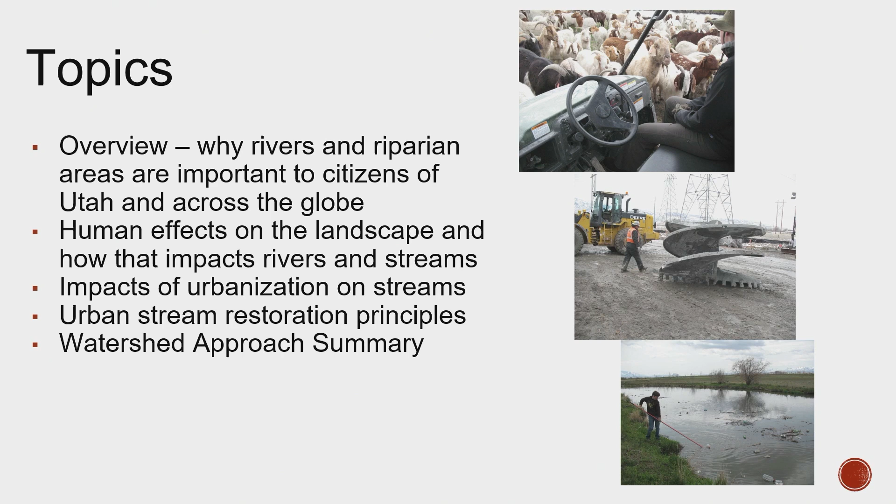So we're going to talk a little bit about why rivers and riparian areas are important, in Utah and really around the globe. Human effects on the landscape and how it impacts rivers. And then we're going to drill down on urban stream restoration principles, and really summarize with our watershed approach and how we work from here.

So how do rivers benefit humans? Maybe this is a rhetorical question, or you can think about what are the things that we get from rivers. We talked a little bit about irrigation, drinking water, and river and stream health is part of our water supply, and sometimes we don't think about that. There's a functional flows work group at USU right now that are looking at how much water should be in a stream to keep it a stream, and is it really a river if there's zero water in it?

Maybe sometimes. We also talk a little bit about ecosystem health. Biodiversity, fish and wildlife habitat, and water quality are really important to us. If you ever see a degraded stream and you think, oh, I really am thirsty, you don't really necessarily go and drink the water out of there. So we need to maintain that ecosystem health for that water quality.

We also have flood resilience, decreasing the risk of flooding, and increasing resilience to climate change. We know we do have these big years, then we have drought years. How do we have that broader suite of services that we can provide?

And then human activities. Recreational values is really big, natural heritage, and cooler temperatures in some certain situations. The picture there on that side is actually of Blackner's Bend. Who's been out to Blackner's at the mouth of Weber Canyon? Paul's been there, and some other folks. So that's a restoration project that was done on the Weber. It's pretty cool if you have a chance to get out there.

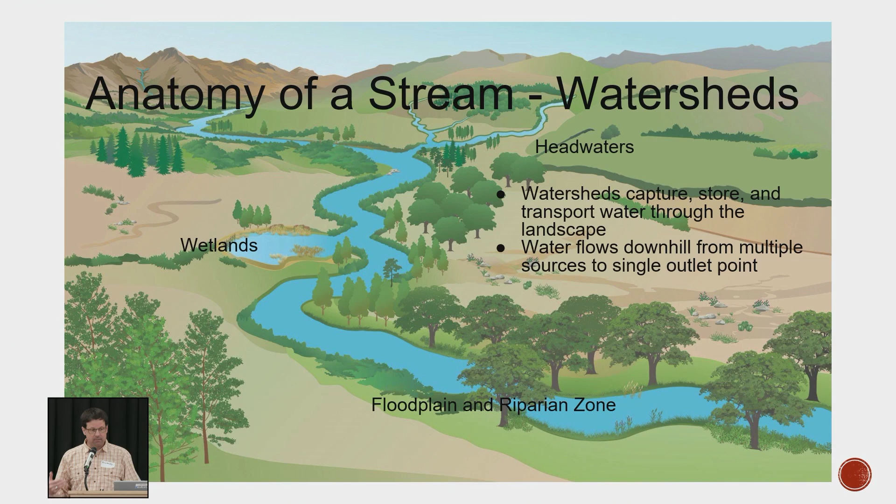So we talk a little bit about watersheds, and everyone thinks, oh, watershed, yeah, it's the area that water comes from and then goes down to Great Salt Lake or wherever. But there's a significant difference between the upper watershed in the Weber and the lower. There's a rural component up higher, and then we get down into here and we've got more of the urban areas, lots more roads and impervious surfaces. So the headwaters are significantly different, and they need different management practices, as what we're talking about today, which is where we're in more of a built environment.

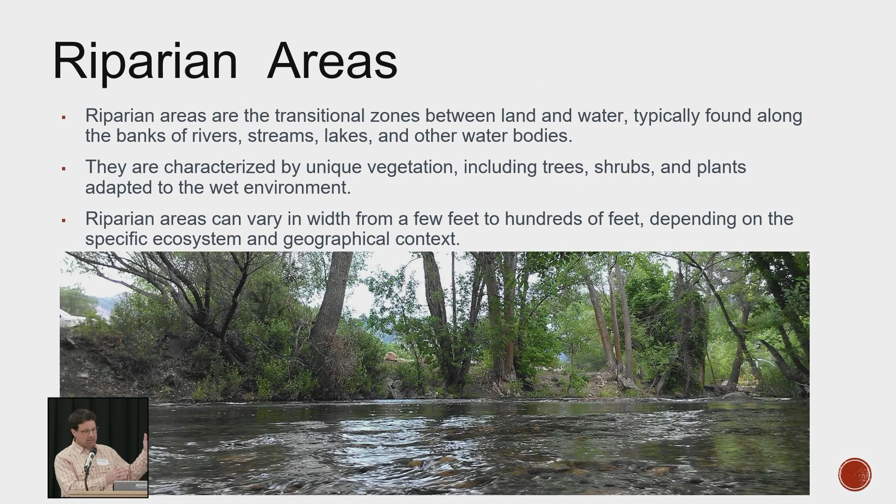And so who here can define a riparian area in one sentence? Maybe nobody. Two sentences. No. So riparian areas can be defined as near flowing water with certain type of vegetation, but it does require sometimes humans to come in and say, all right, what really is a riparian area? Where is it here? Especially in urban areas where we've impacted the water so much that they're not really like cottonwood forests in Montana or whatever. It's different. And so they are near flowing water. They have a certain vegetative characteristic, and generally, part of the floodplain is what we're looking at. And they can vary from a few hundred feet or less, depending upon the ecosystem and the geographic area.

So Paul's going to talk a little bit about the human component, but I wanted to mention, I put this picture in the middle on the bottom. Does that look like human-made or natural-made? That was on the Legacy Nature Preserve, and almost all of that was made by humans. There's even a bald eagle nest in the background that a guy named Bob Walter stood back up after it fell down in a windstorm. So, when you add water, it really helps. So Paul's going to talk about the human component.

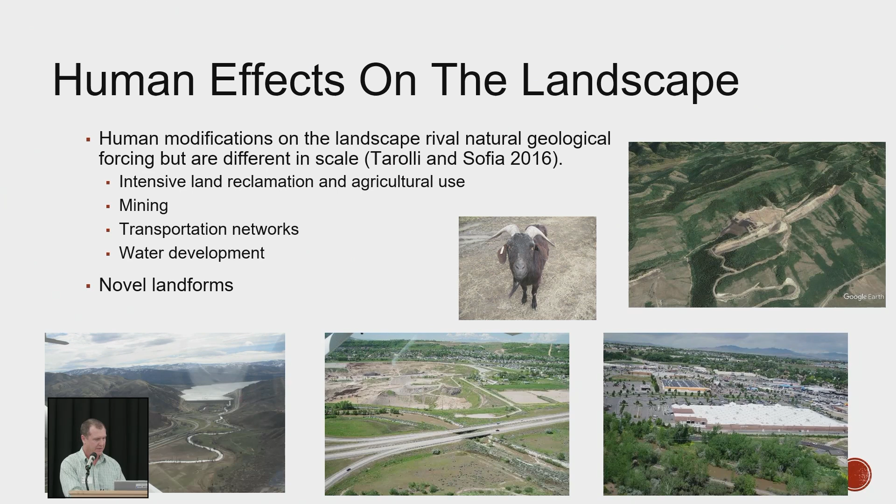Really briefly, we've been talking about this quite a bit today, but humans have dramatically reshaped landscapes through land reclamation, expansion of infrastructure, altering natural flow regimes, and all these practices are really important for society, but they also have major consequences for streams and stream channels and river health. This is the same imaginary watershed that Eric showed earlier, but it illustrates the accumulation of impacts within a watershed.

Oftentimes when we're looking at challenges with a river or stream, we're faced with a site-specific challenge related to a waterway. For example, maybe we're dealing with eroding banks or sediment accumulation in the channel. Oftentimes that site-specific challenge is a symptom of larger scale issues that we don't necessarily see when we're just looking at a specific location or area.

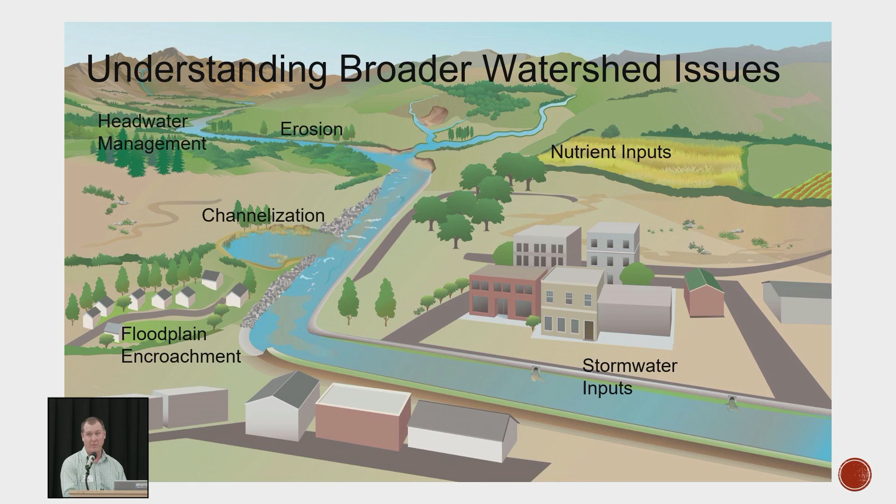So in this imaginary watershed, there's lots of things going on that might be leading to management challenges, such as headwater management, erosion up in the middle of the watershed, maybe nutrients coming from agriculture or urban landscapes, stream channelization and floodplain encroachment. They can all accumulate and really affect what we see on the ground when we're dealing with stream channels and urban rivers.

During high water, this bridge catches a lot of debris from the Weber River, and the consequences of that are it backs up the flow, causes sediment to deposit upstream, and changes the channel morphology up there. So when we think about managing specific reaches of river, we have to take into account these kinds of things on the landscape, because we're not going to be able to move this bridge, at least in the near future.

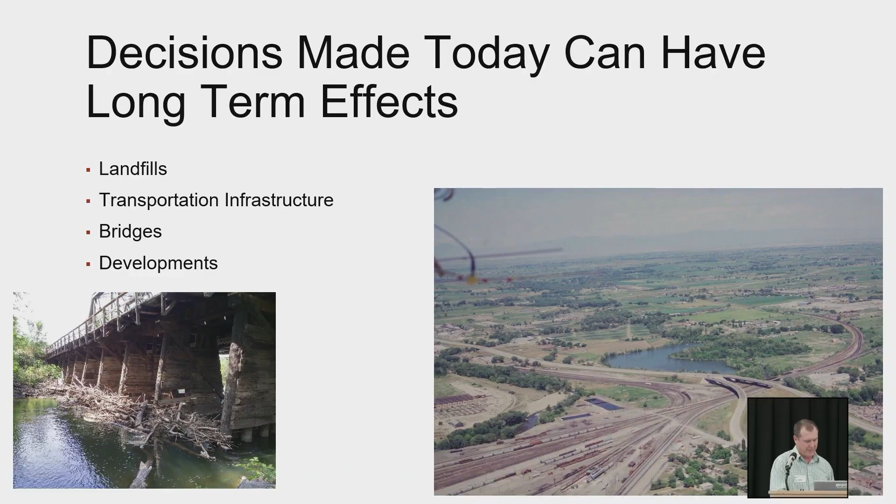It's a fixture on the landscape that we have to deal with. The picture on the right illustrates the confluence of the Ogden and Weber River back in the 1960s - this is actually a photo of that area in the 60s. The main characteristics to highlight are a pretty broad riparian area and meandering stream channels. But when you compare that to this Google Earth screenshot, which I tried to match up as much as possible, the landscape's changed, right?

A lot of industrial areas have encroached on the Weber River. Right in the middle - I don't know, there's probably not a laser pointer, and if I can make that happen... doesn't look like it. Right in the middle, right above the pond, is a large landfill that's been placed right at the confluence of the Weber and Ogden River.

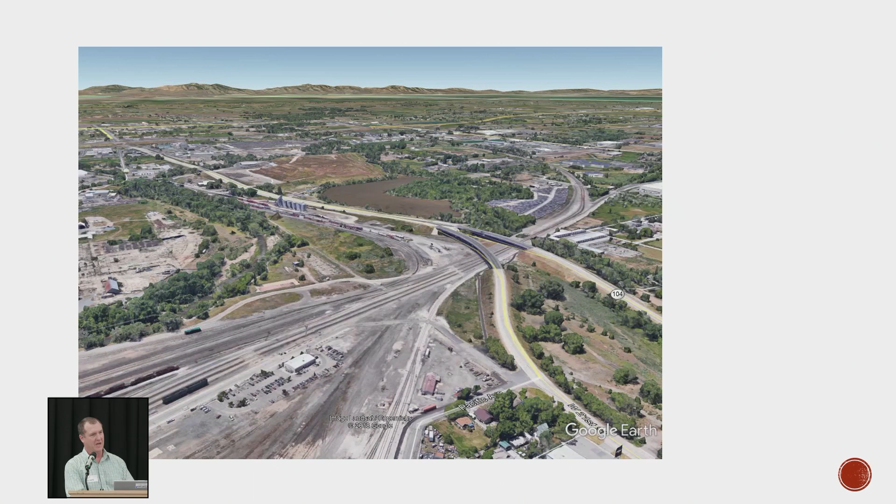And then just to the right of the pond is a junkyard, right? Those are fixtures on the landscape that we have to deal with when we're looking at river management or river restoration. Those are things that are likely not going to be moved or changed when we do restoration.

So I'm going to talk a little bit about the effects of urbanization on streams and rivers. What are some of the things that happen when we urbanize around these areas? We cut off the floodplains a lot of the time, or maybe we remove the water, and there's something called the urban stream syndrome.

Altered hydrology, I think, is one of our biggest opportunities to change, because we manage the water, and managing the water in a way that maintains the resilience of these streams is important. If you just let them go dry, there's nothing holding the banks together because there's no vegetation there, and it can create a cycle that's a problem. There's also impervious surfaces that increase runoff really fast.

We have larger volumes of runoff, peak flows, and the frequency of those flows can go way up if you have a bunch of impervious surfaces. So that was discussed in the Chesapeake Bay discussion earlier.

We also have simplified channel geomorphology. When we lose those floodplains, a lot of times the river doesn't do exactly what we want it to do, which is stay within its banks. As Paul mentioned, at that railroad bridge, the water gets stopped up there because all the debris gets stuck in there, and then it drops a bunch of sediment out just upstream in the Ogden Business Exchange area. So that's just a consideration.

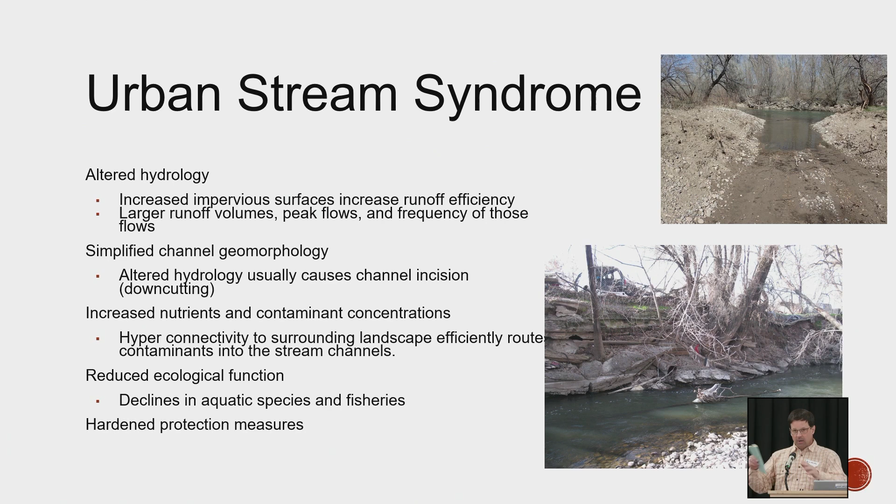And hardened protection measures is what ends up happening a lot of the time. So we just want to consider those when we're thinking about what tools we have, where can we make those differences? Can we take out the bridge, or make those spans larger? The railroad said about $1 billion - if anyone's got $1 billion, we can do that. But we really do have to prioritize.

This, on the upper right, is basically a trash collection system on the Ogden River. It works really well to keep a lot of that garbage out of there.

So you just want to think about how do we transfer stormwater to the systems? We create this flashy hydrology, so how can we maybe spread that out a little bit and then reconnect some of the floodplains, so we have that ability to manage these different hydrologies?

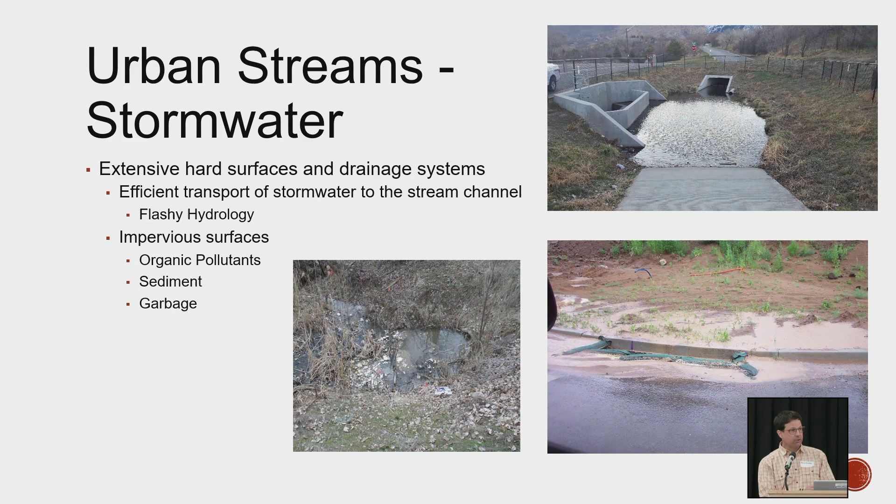We've also got impervious surfaces and all the runoff that comes off of those. That's been shown to be a significant source of nutrient pollution, sediment, and garbage, as we mentioned. So there's lots of things that happen in streams, and we want to think about where can we have the maximum effect for doing work on these streams, and how can we get together and have partnerships to do those things.

So channel confinement is a significant issue. If you can imagine, when the river is able to flood out into the floodplain, what happens to the sediment? Sometimes it drops out, sometimes it creates floodplains, and it nourishes the system. But then you take away that floodplain, and where does all the energy go? Does it go to the sides? It goes down. In parts of the Weber River, they think the bottom of the river has gone down as much as 20 or so feet.

Jake talked a little bit about floodplain management. If it's already gone down 20 feet and that's our baseline, and we're trying to go back, it's a tough regulatory environment. So that scour is something to consider, and the sediment transport, and also where that sediment's going to drop out.

I remember that from my youth. I grew up in Virginia, and what happens right at the end of the city? All the levees go away, and then all the sediment drops out, and all the farms downstream had issues.

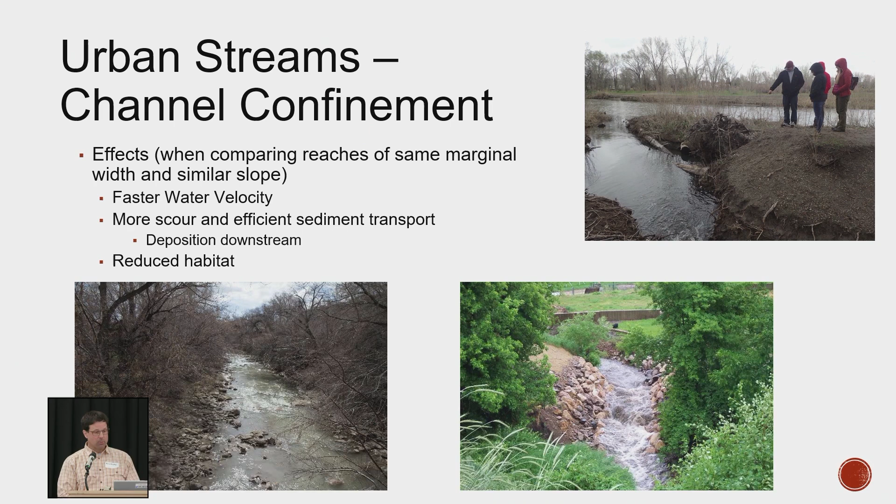So reduced habitat is another significant issue, and we look at places where we can improve the habitat. Bridges are really expensive to put in, and if you put them in wrong and have to replace them, they're even more expensive. You want to give the river the room that it needs, and sometimes that does require some upfront costs. But those hydraulic pinch points are some of the most significant opportunities for change, and they create flooding issues and things like that.

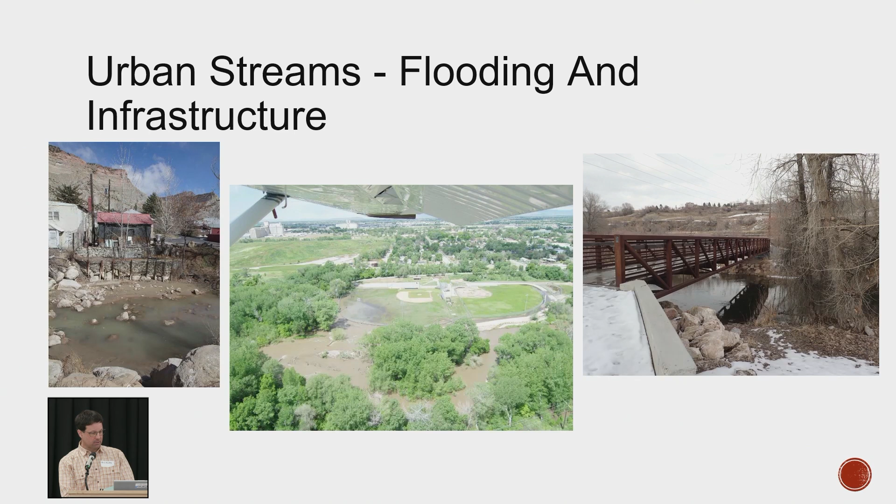Okay, thank you. So we've got 5 minutes left, and Paul's going to talk a little bit about the key principles of urban streams. There's 5 minutes and 5 principles, so I'll go through them.

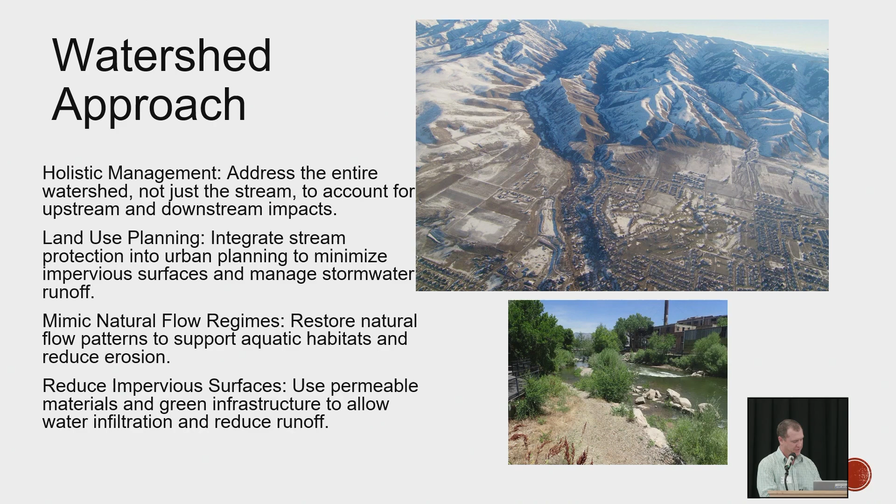Really important, when dealing with an urban stream and restoration, is taking a watershed approach. This means not only looking at what's contributing in your upper watershed, but also managing stormwater and trying to replicate the natural processes of infiltration and restoring those natural flow regimes.

Second is riparian corridor protection. Eric mentioned riparian areas a little bit - it's that transition between water and upland. Generally it's challenging in urban streams, but the wider the riparian area you have, the healthier your urban river is going to be. Shooting for 30 feet or greater in width with native species is really critical. Restoring and maintaining these buffers is relatively simple, but it's really powerful in terms of improving urban stream health.

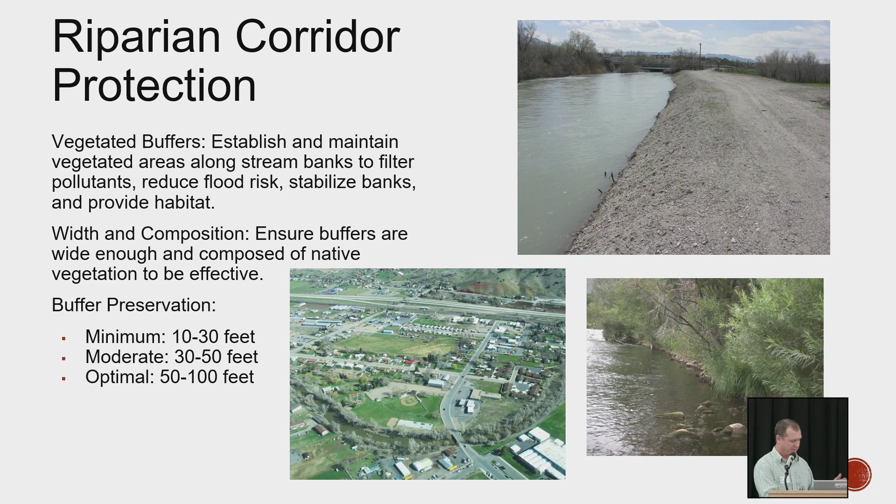Third, urban stream channels are typically really channelized and straightened, so reconnecting floodplains, allowing floodwaters to spread out where it's possible, is a really important way of restoring those natural processes within the streams that maintain and restore water quality and habitat.

Restoring meanders is really important if it's possible. A lot of these urban systems are really confined, but there are places where restoring meanders is possible. That slows down the water, creates diverse habitats, and then bringing in natural features such as riffles, pools, and even some natural woody debris - which maybe some flood people don't like, but wood is really important for maintaining habitat for aquatic species.

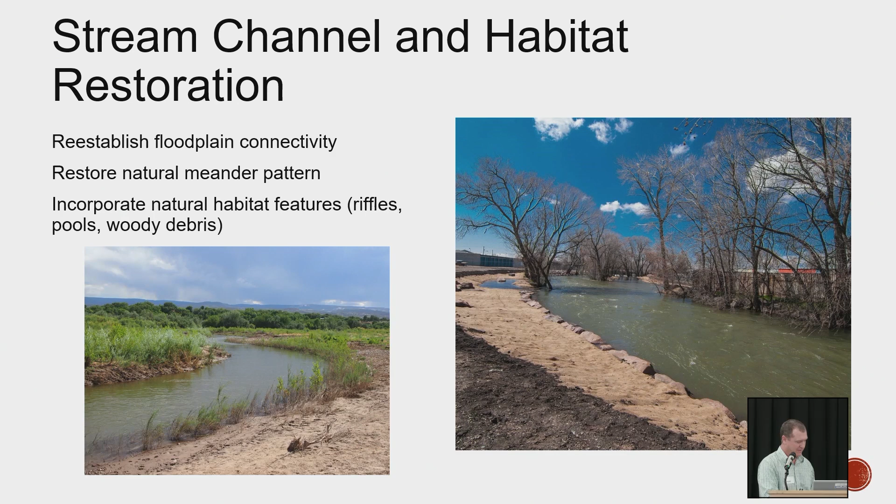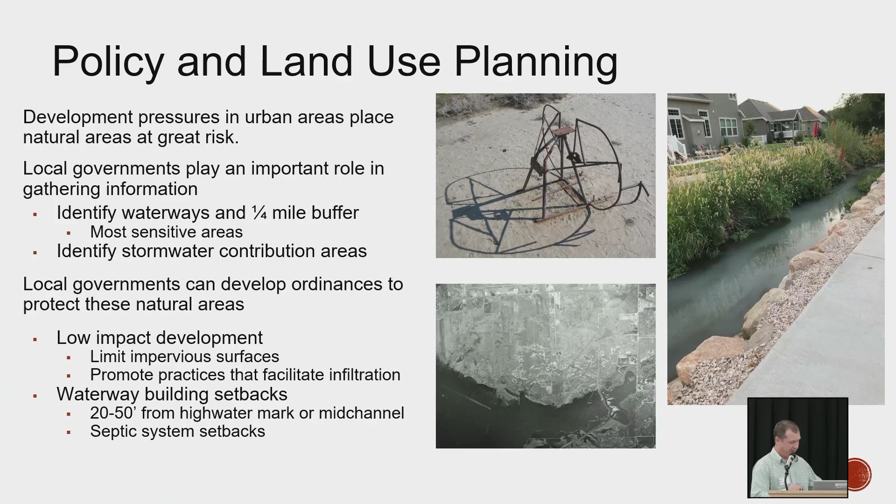Development pressures are one of the biggest threats to urban streams, and local governments can play a key role in balancing growth with stream protection. There are a lot of things local communities and governments can do on the policy side to protect waterways - identifying sensitive areas, implementing low impact development strategies to minimize or break up impervious surfaces, and establishing setbacks for new buildings and septic systems to prevent contamination and erosion in urban systems.

But restoration isn't just about engineering and policy - it's about people in the community. Research has shown that when healthy streams are available to people, they like them and they use them. Successful restoration or protection involves local communities in planning, implementation, and long-term stewardship.

There are a lot of different ways to do that. Just a plug for the Utah Water Watch program, a citizen science program that focuses on water quality monitoring in urban areas - that's a great way to engage the communities.

Developing goals is really critical. We've been promoting the idea of watershed plans, and engaging partners and stakeholders is a critical component. Bottom line, this is just a jumping off point for Justin, but it's possible to do urban restoration and provide these spaces for people in places that are really heavily built. Justin's going to talk about how that's actually happened, but with that, we'll take any questions.